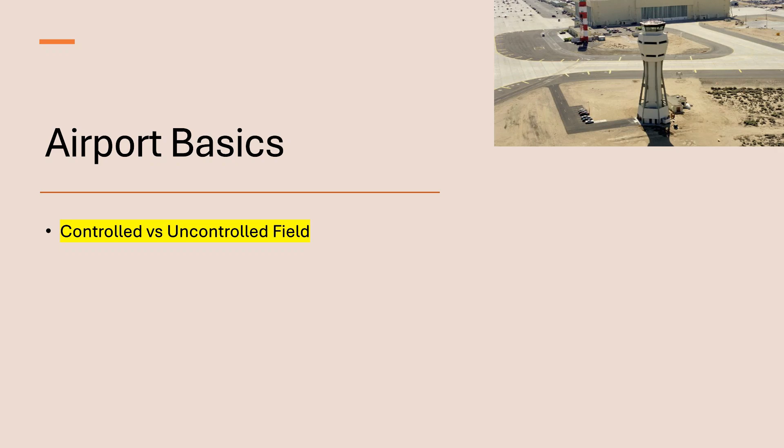Let's talk about taxiway signs. If it's got a black background, that means that's the taxiway you're at. So right there, it's showing us we're on taxiway Alpha. And if it has a yellow background, that means you're turning, for example in this picture, we're turning right onto Charlie. So black background means where you're at, yellow background means you're turning onto that taxiway.

Runway markings: if you're on the double solid line, so on the left side of this picture, that means you're about to enter an active runway. It's kind of like how highways work. If you're on the double solid entering the dash, that means you either need a clearance or you need to talk to someone and look both ways to make sure that runway is clear.

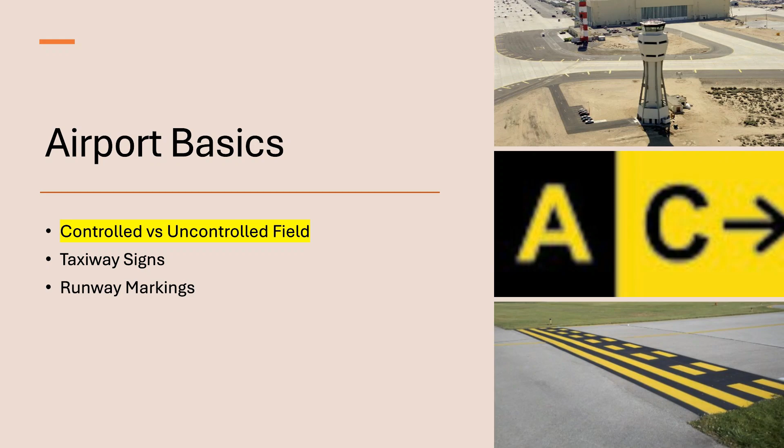And if you're on the dash side, going onto the double solid or the left side, that means you're exiting a runway and you don't really need a clearance for that. Just exit the runway, and if you want, you can make a radio call saying, 'Auburn traffic, emergency vehicle, clear of runway 36,' for example.

The ILS critical area, or instrument landing system critical area, is an area trucks have to hold short of in order to not block ground landing equipment. That way aircraft can use it to land, and it'll typically only be used in low visibility conditions. But personally, I'd always hold short of this at all times, just because some aircraft use this even in good weather to gauge where they should be when coming in to land, especially when using autopilot.

Let's say an aircraft has a stuck gear. They're coming in, and if we're there, there's going to be some sort of incident with that aircraft, whether it's a gear stuck, a failed engine, or something wrong with the aircraft. More often than not, that pilot may use an autopilot to help them down to the runway, and not all aircraft are equipped with GPS systems that'll use GPS approaches, so they'll use that ground equipment to help guide the aircraft down to the runway.

So I would always hold short of this critical area. It looks like that yellow ladder on the ground in the picture, and we'll show everyone what it looks like at the airport. Once the tower is in operation, they'll specifically tell you whether you're cleared to cross that critical area or not. But like I said, personally I'd just hold short of it at all times if the tower's not in operation. The tower will tell you when it's in operation during the day.

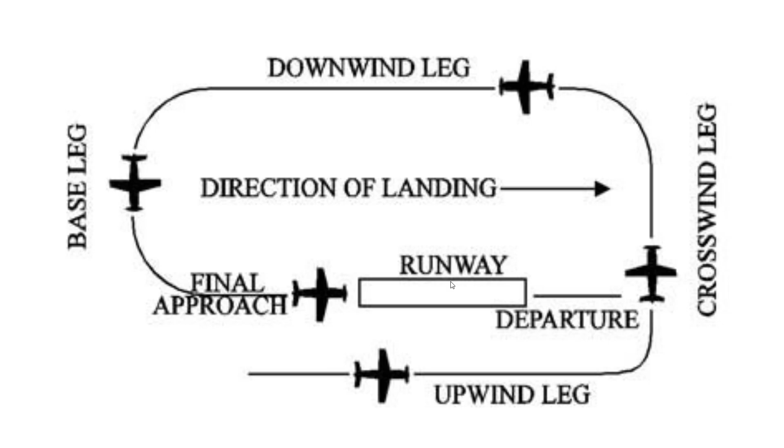Understanding radio usage is very important to build spatial awareness around the airport when listening to radio calls. Controlled airports require a clearance; uncontrolled airports do not, but you need to let others know what you're doing over the CTAF frequency. Auburn has a part-time tower, so around 7 to 8 p.m. it becomes an uncontrolled field until around 8 a.m., when the controlled tower opens back up and it becomes a controlled field again.

We talked about the general radio call layout: who you're talking to, Auburn Tower or Auburn Traffic depending on if the tower's in operation, who you are (emergency vehicle), where you are — if on the ramp, you'd say ramp — then your request. If the tower's in operation, it sounds like: 'Auburn Tower, emergency vehicle, FBO ramp, request taxi, runway 36.' Typically in an emergency, the tower will immediately clear you to taxi, and you just confirm 'clear to taxi' over the radio, as long as there's no miscommunication and you get your point across.

That's what we need to do. Just get her point across. The most important guideline in airport operations is just to listen.

If you have a ground radio, not everyone might have one, but make sure the incident commander is communicating what's going on to other emergency personnel across the airport. Use standard aviation terms over the radio, saying affirmative, negative, Roger, not 'clear.' If you say clear to a pilot over the radio, they won't understand. They're also painting a picture in their head of what you're doing on the ground as an emergency vehicle, so if they hear 'emergency vehicle is clear' or anything like that, they won't know what you're talking about.

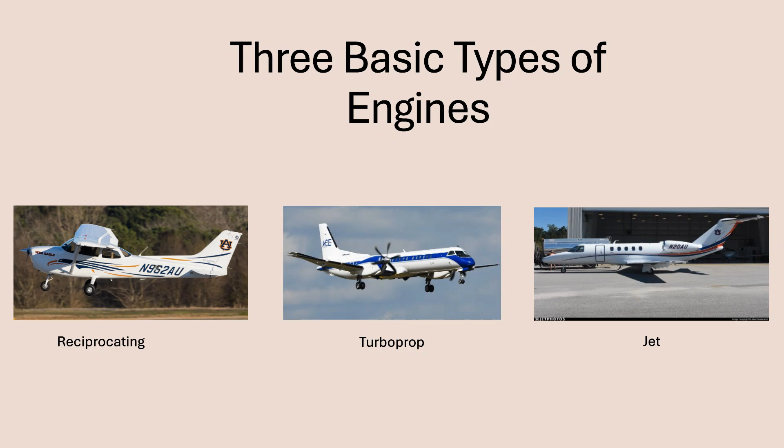Instead, you should use foam or a halon fire extinguisher to put out the Class B fire. ABC extinguishers are not recommended either, mainly because they can cause irreplaceable corrosion to the aluminum components and possible structural failure. As a last resort, if that's all you have, an ABC extinguisher is better than water. But just know that if you use these ABC extinguishers, that aircraft will have to have a major overhaul and possibly be scrapped.

General K-12 operations. Aluminum will not spark and can be cut with a rescue saw, such as a K-12. Many of you know this, but make sure you spray water on the rescue saw as you cut, so that the aluminum does not melt to the cutting device.

An auxiliary power unit, or APU, is a small jet engine. It sort of looks like this, and it's typically on the tail of most bigger airplanes, such as jets. The APU is used to generate electrical power on a larger aircraft. A lot of engine fires on startup typically apply to these APUs.

Moving on to outflow valves. An outflow valve is a little hole, typically in the tail of the plane. We'll talk more about outflow valves, but this is kind of what they look like. If an aircraft is having pressurization issues on the ground, such as it can't equalize the pressure, whether that's an electrical or mechanical issue, whatever's going on there—let's say you go up to a door and it will not open.

The first thing: do not force open a door that can't open on an aircraft. Typically what you'll do is equalize the pressure. You'll take a pick head axe or a pike hook and go to the outflow valve on the back, and there will typically be instructions on how to operate it. I've never opened or messed with an outflow valve myself, but there will typically be instructions. If you don't equalize the aircraft and you force open a door, that door can possibly shoot out and fatally hurt somebody.

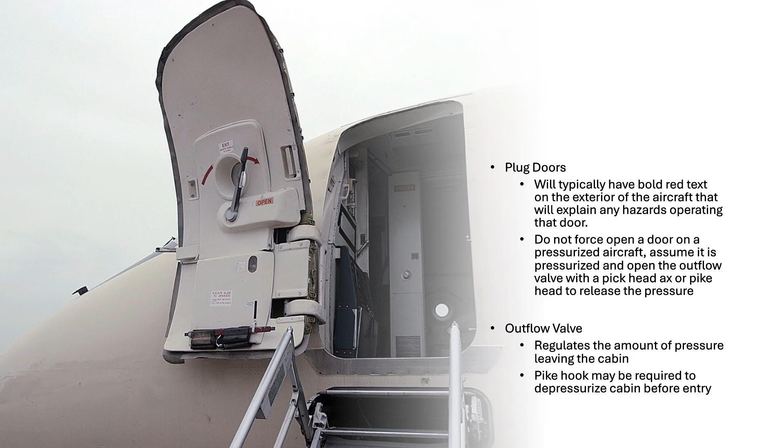This is something I found when I went to Montgomery, Maxwell Air Force Base. It's a very useful document called the Technical Order, TO 105E-9, issued by the United States Air Force, providing instructions for operating and repairing equipment in vehicles. This TO 105E-9 contains quick reference materials for military aircraft and many general aviation aircraft, such as the Cessna 172 which Auburn flies, plus military variants very similar to Auburn's aircraft, like the Piper Seminole which is closely related to the Cessna 310 also in this document. It does a really good job breaking down these airplanes.

I included it here because, as you can see, the Cessna 172 Skyhawk is known as a T-41 in the Air Force, but it's the same aircraft, just the military variant. This breaks down the general engine shutdown and the components that go into this Cessna 172, one of the main aircraft Auburn flies in their flight program.

When you're exposed to an aviation cockpit, whether a Cessna 172 or any of the other airplanes Auburn operates, you want to operate from right to left. The mixture control here controls the amount of fuel entering the engine cylinders. Pull this out to cut the fuel off. Then pull out the throttle control knob, which idles the engine. Then the ignition switch, the most important of all, will shut down the engine immediately.

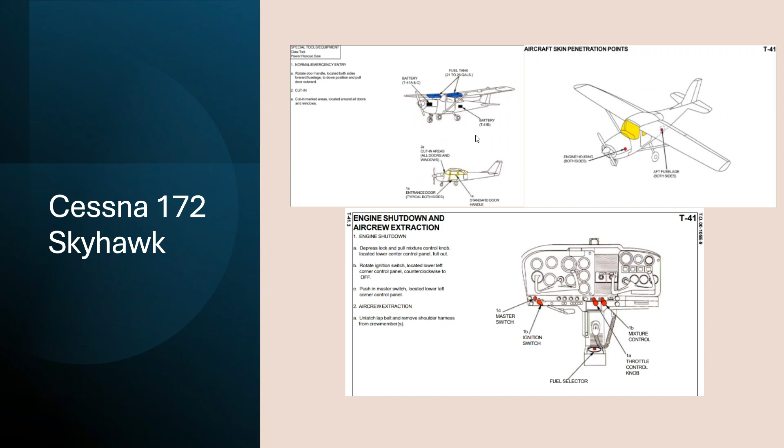As we said earlier, 100 low lead gas is very flammable, so be very, very careful with sparks because they do not mix well. Any type of aviation gas, whether 100 or 100 low lead, is a recipe for a not-so-good day. Here's a Cessna 310.

Auburn does not have a Cessna 310, but we have a Piper Seminole, which is very similar to this aircraft. It has wing tanks but does not have the fuel outlet that the Cessna has. It does have a very similar cockpit layout - again right to left, mixtures, props, throttles off, then the mags will be down here. I won't go over this one a lot since it's not the same aircraft Auburn operates - it's a completely different plane, just generally the same layout.

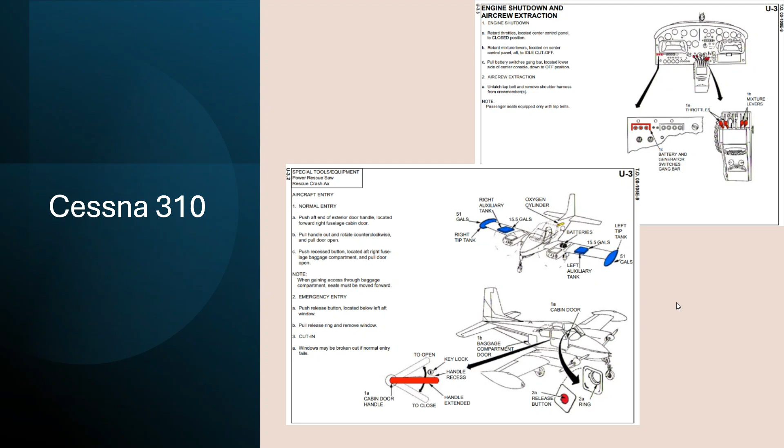But I'll get into the Seminole cockpit layout here in a second. Here is an aircraft overview of the two main aircraft Auburn flies - this is the Seminole I was talking about, here's the Skyhawk or Cessna 172, and the Piper Seminole. The Cessna 172 is a 53-gallon aircraft.

Fuel is mainly located in the wing tanks like we saw earlier. The door opens from a pull-out latch and it can only be opened if it's unlocked from the pilot side, on the left side looking forward. The doors do open on both sides, but it's only able to be unlocked from the pilot side. Really doesn't change anything if you have to extricate somebody, but just something to know.

Single engine, clearly. Both are reciprocating aircraft. This is a 110-gallon aircraft. Fuel is located in the rear of the engines, back here in these fuel nacelles.

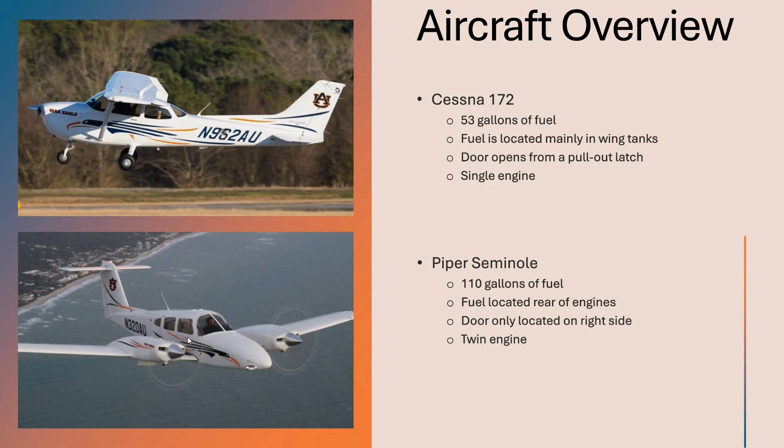There's one door here on the Piper Seminole. On the pilot side, there's only an emergency egress window. So that's the only way the pilot's going to be able to get out if he's entrapped in his seat. There's no door on the left side, only an emergency egress window, and then there's a single emergency egress window. Here's the Cessna Citation and the Saab 2000 we were talking about.

So Auburn flies two Cessna Citation jets with a team of 6 pilots, supported by a maintenance manager and a dispatcher. They fly faculty and administrators and support athletic recruiting for the school's football and basketball programs with that jet.

The Citation carries 870 gallons of fuel, but that is at full capacity. Pilots will normally land with around 300 to 400 gallons. This aircraft is pressurized. However, pressurized, like we said earlier, wouldn't normally be an issue as it would depressurize with weight on the wheels. But if the system does fail, you may need to use that outflow valve in the event of an emergency or electrical failure.

There is a main entry door forward of the left wing and an emergency exit behind the right wing.

The Saab 2000 also is operated by Auburn for sports teams to travel on. It's a twin turboprop transport category aircraft designed to carry 58 passengers. However, all Saabs operated into Auburn's airport are set up in a 30-seat passenger configuration. The Saab 2000 carries 1,370 gallons of Jet A fuel and will land with around 500 to 600 gallons.

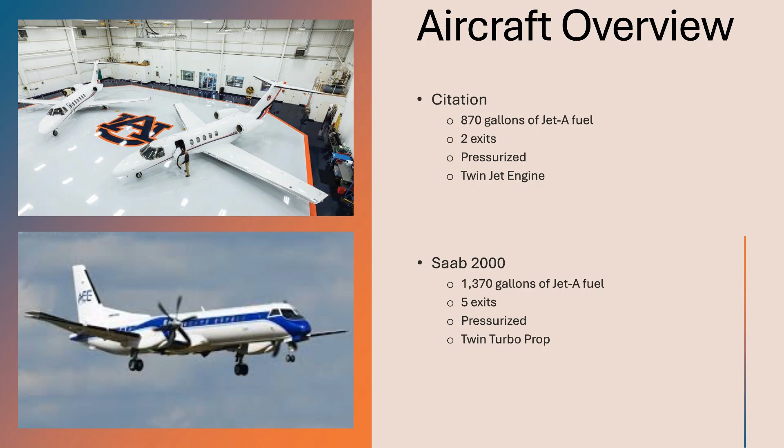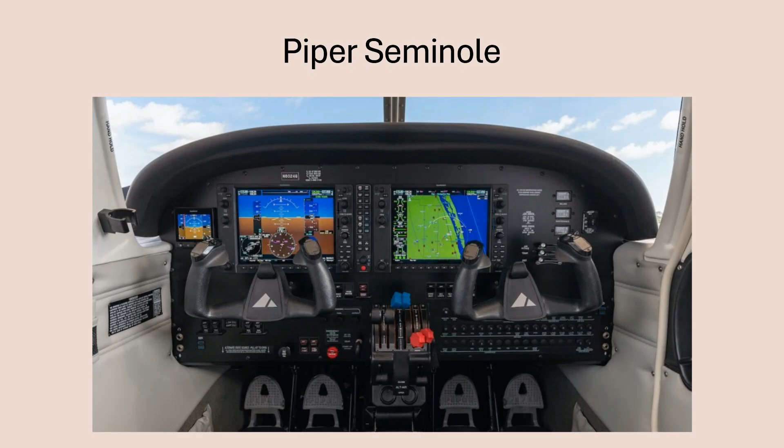So we talked about Cessna, we talked about Piper, we talked about some basic aircraft systems involving fuel, electrics, shutting down the engines. The last manufacturer I want to talk about is Cirrus. Cirrus has a few airplanes that operate in and out of the airport. Common models include the SR-20 and the SR-22.

These models made by Cirrus have some interesting systems that can potentially hurt first responders if they're not aware of how these systems work and how to deactivate them.

The Cirrus aircraft has what's called a CAPS system - a Cirrus aircraft parachute system. It's a rocket-propelled parachute that shoots out of the airplane and brings the aircraft down to the ground when the pilot deploys it.

Since it's rocket boosted, if it's not deployed by the pilot and is still armed on the ground - let's just say the pilot decided to land in a field or on a road and didn't need to use the parachute, which has happened in the past -

first responders need to be aware of how to either deactivate the CAPS system or how to avoid messing with the armed wire. There's an armed wire behind the pilot, where if that wire is moved even an inch, it could potentially deploy the parachute, shoot off a rocket, and possibly shoot shrapnel within a 1,000-yard radius and hurt somebody.

So this video is going to talk about the systems associated with the Cirrus, and then we'll go over the safety documentation briefly. We'll scroll through and see how to deactivate the system.

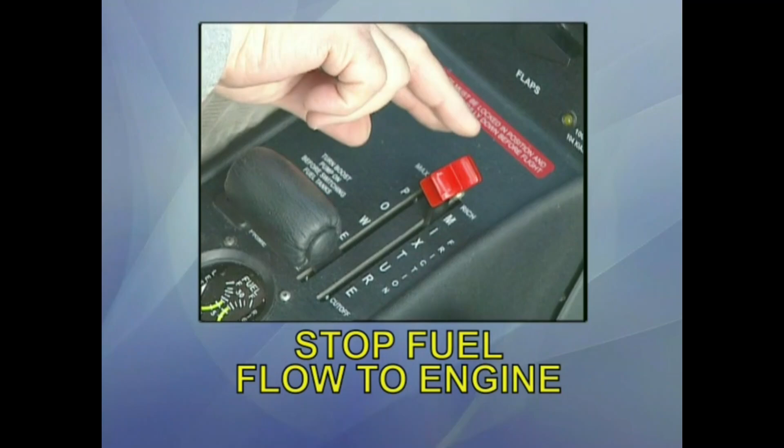Access the cockpit and locate the red fuel control. Pull the control aft to the idle cutoff position. Most fuel controls are red and have star-shaped handles. Others may resemble a large cabinet door pull.

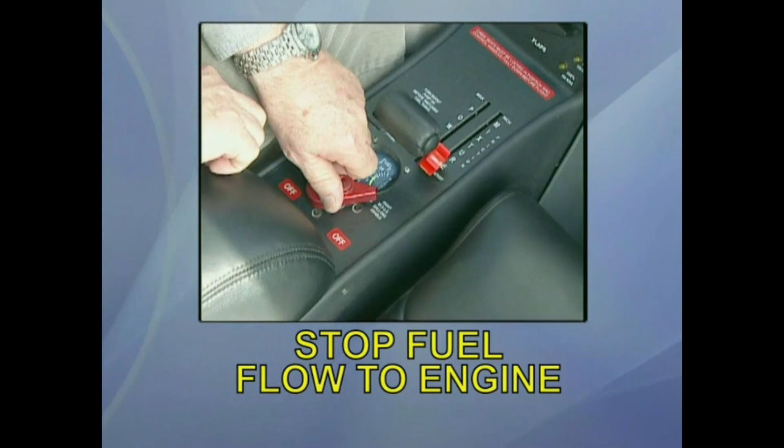You can also move the fuel selector valve handle to the off position. The fuel selector is usually located near the center of the instrument panel, in the center console, or on the left side of the aircraft's fuselage near the pilot's seat.

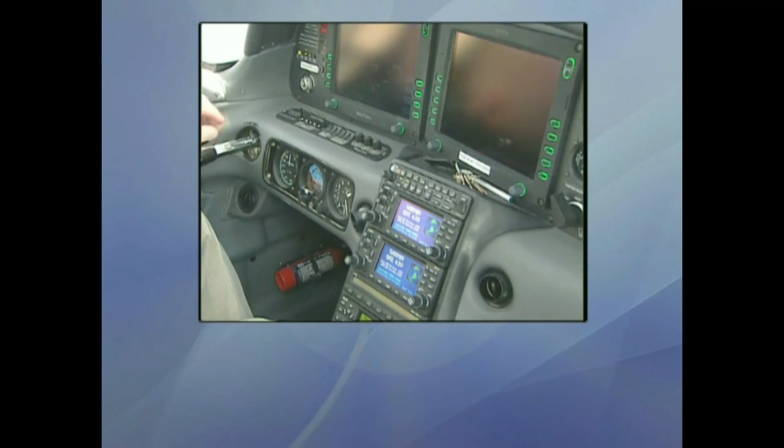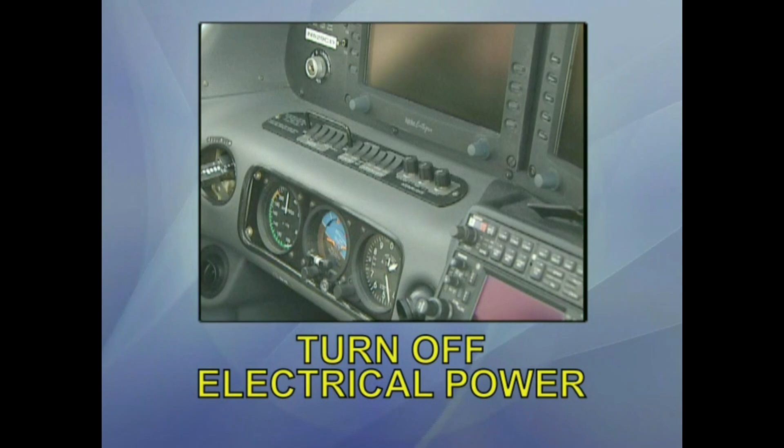Once the engine is shut down, turn off the aircraft's electrical power. Locate the master switches on or below the instrument panel, above the left cabin window, or below the pilot's left side window, and make sure the switches are in the off position.

If the aircraft has a key in the ignition switch, turn the key to the off position and remove the key. If the aircraft is intact and there is no fire, the cabin can be locked for security. Give the key to the accident investigators when they arrive.

Be aware of fuel, oxygen, and TKS tanks. Most aircraft carry fuel in their wings or in separate header tanks located above and aft of the aircraft's engine. Some have auxiliary tanks at the wingtips. Aircraft which are being flown long distances may have auxiliary fuel tanks installed in the cabin or baggage compartment.

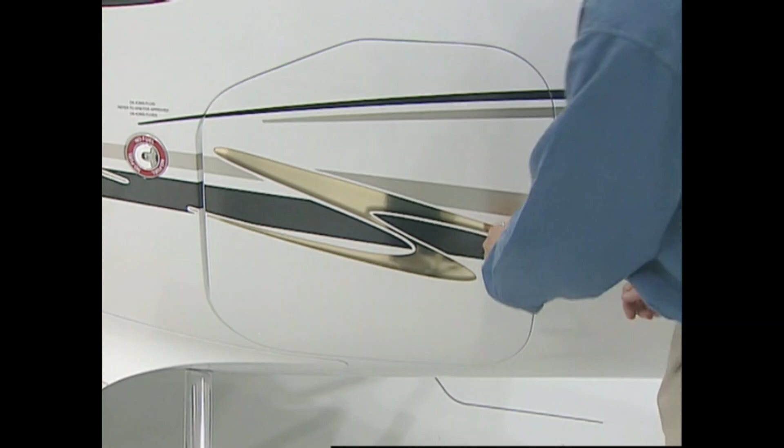Many of today's general aviation high-performance aircraft have TKS fluid on board to de-ice the aircraft's flying surfaces. TKS fluid is generally stored in a dedicated tank, but aircraft operators have been known to carry auxiliary containers of TKS in places like the baggage compartment or in the backseat of the aircraft. Similarly, GA aircraft that routinely fly at high altitudes may be carrying portable supplemental oxygen bottles on board. Oxygen, like TKS fluid, can present a hot spot in an aircraft fire.

Be on the lookout for composite hazards. Many of today's aircraft are made of composite materials and foams that can produce toxic or poisonous gases if they burn. The accident site should be approached from upwind while wearing an oxygen breathing apparatus or an organic vapor mask. Burned composite surfaces may disintegrate to the touch and may not support your weight. Extra care should be taken to protect yourself from composite dust, sharp needles, and shards of composite materials in the aircraft wreckage. Treat composite cuts or abrasions immediately.

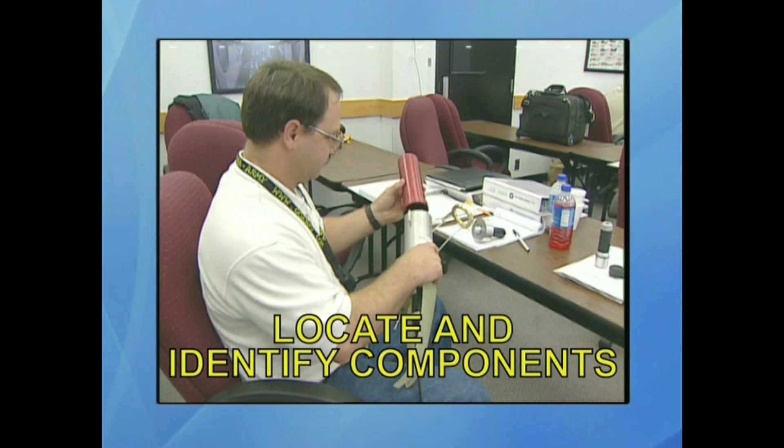Locate and identify all components of the CAPS or ballistic parachute system. Look for the rocket canister as well as the igniter assembly. The rocket canister is a red canister about the size of a 16-ounce beverage can. When you locate system components, always consider them as live ordnance. Don't handle them, and keep heat or flame away from them if possible. Mark the components to remind other first responders to stay away from them, and call the Cirrus hotline at

800-279-4322 immediately. Air safety personnel at Cirrus can help you determine what risks are present and will send trained accident personnel to assist you with disarming any and all safety systems in the aircraft or wreckage.

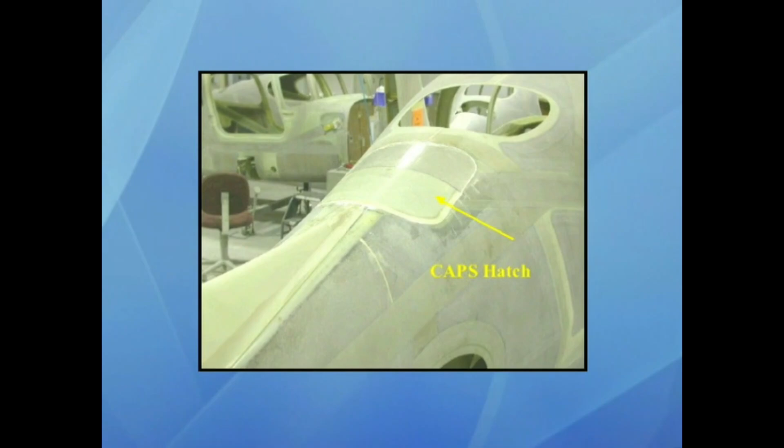An emergency locator transmitter, ELT, is required equipment for all certified general aviation aircraft. ELTs automatically transmit a locator signal to the U.S. Air Force search and rescue facilities if the aircraft experiences a sudden impact.

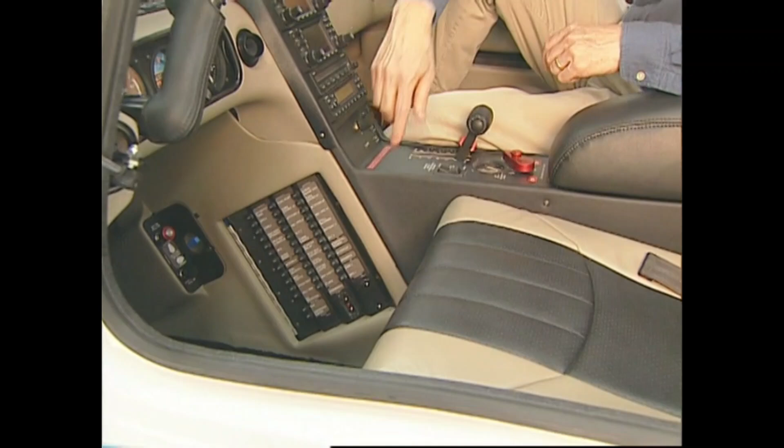You may be asked to locate and turn off an ELT at an aircraft accident site. On the Cirrus and most recent production aircraft, an ELT shutoff switch can be located on the instrument panel. If the ELT has been activated, a small red light next to the on-off switch may be flashing. Simply press the black button to switch the ELT off.

Never cut into the top of the aircraft or the area from the top of the doors to the baggage compartment, as this is where the CAPS activation cable is located. If this cable is pulled or dislodged more than a quarter of an inch by cutting or penetrating gear, the pull of the cable could set off the rocket igniter and deploy the rocket.

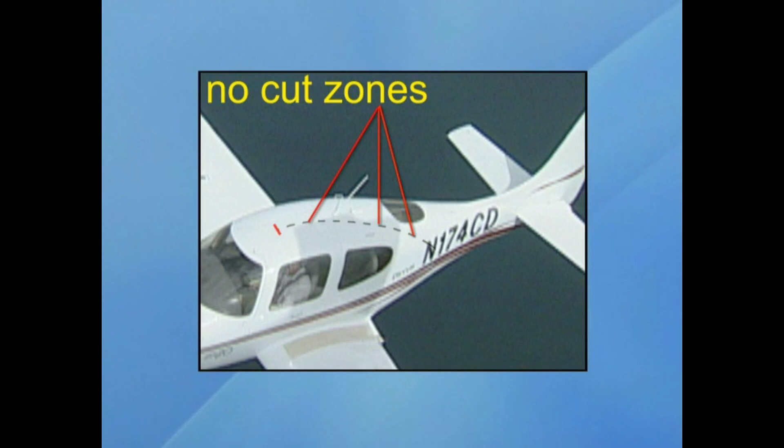If the CAPS system has been deployed during high wind conditions, the aircraft could be dragged downwind after it touches down, posing a hazard to personnel and objects on the ground. The best thing to do in this case is to collapse the large canopy by spraying it with water from a fire hose. Once it is collapsed, park a heavy vehicle on the canopy to stabilize the aircraft from further movement.

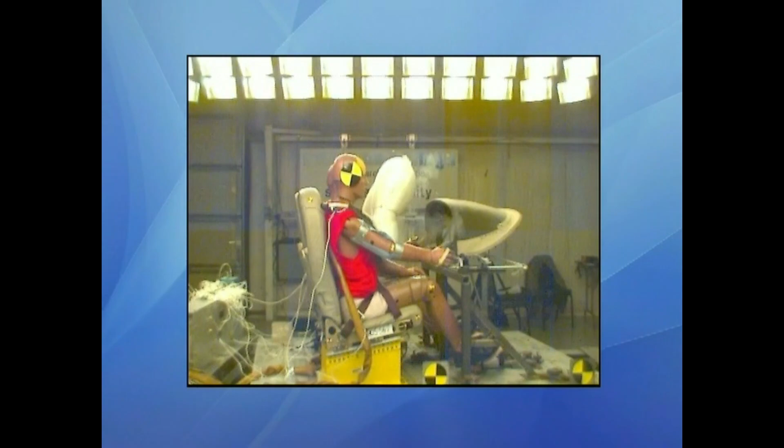The other potential hazard you may encounter involves the AAIR, or AmSafe Aircraft Inflatable Restraints. These restraints work like an airbag to protect aircraft occupants from injury to the head and body. On a 3-point system, the airbag itself is attached to the lap belt, while on the 4-point harnesses, the airbag is located inside the outboard shoulder harness. Both systems use a heavy leather shroud to protect the airbag itself.

The danger in this system comes from the fact that it uses compressed helium to inflate the airbag. Like the CAPS system, you must always assume that the system is live unless you see that the airbags have been deployed. Cirrus works closely with the National Transportation Safety Board to maintain an accident investigation team that's ready to respond to any Cirrus aircraft accident 24 hours a day.

Although each system's installation will differ slightly, all ballistic parachutes and AmSafe AAIR airbag systems will operate by the same principles and will use the same basic components. That's why it's important to know what to look for. Think about these things.

We have to assume that it's got a system on board when we go out to an accident, rather than be surprised by when we find one. I think that's the key. And then what do you do? How do you deal with it? Who do you call? Of course, you have to identify and notify. That's the policy: identify that you have a rocket, and then call somebody that can help you. Cirrus will be glad to help you.

The next time you respond to an aircraft accident or fire, consider that the aircraft might be equipped with a ballistic parachute and AAIR restraints. Proceed accordingly by approaching from the upwind side. Identify and locate all components. Assume the systems are live unless visibly deployed. Keep heat and flame away from the site. Remember the no-cut zone on Cirrus aircraft, and most importantly, contact the Cirrus Air Safety Department immediately. Finally, qualified personnel should remove all hazardous components from the aircraft wreckage before it's transported from the accident site to the salvage yard. We're committed to your safety, and we're here to help.

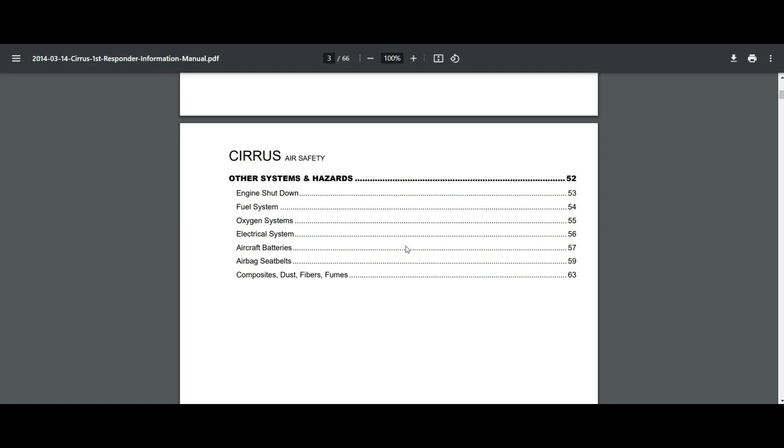There's a first responder info manual right here, and it kind of just goes over all of the air safety summarizations. It goes over the CAPS system, how to disable, securing, disabling CAPS. This would be the more important section to go over, so I'm not going to go over this in this presentation - if you want to, I'll share these documents. But it just goes over basics on how to disable the CAPS system, and has oxygen systems in here. Everything you need to know, just in one document, pretty well laid out - what pliers and cutters to use, so you're not pulling this Cirrus activation device for the CAPS system, because if you pull this, it could potentially deploy that. So, just important notes there.

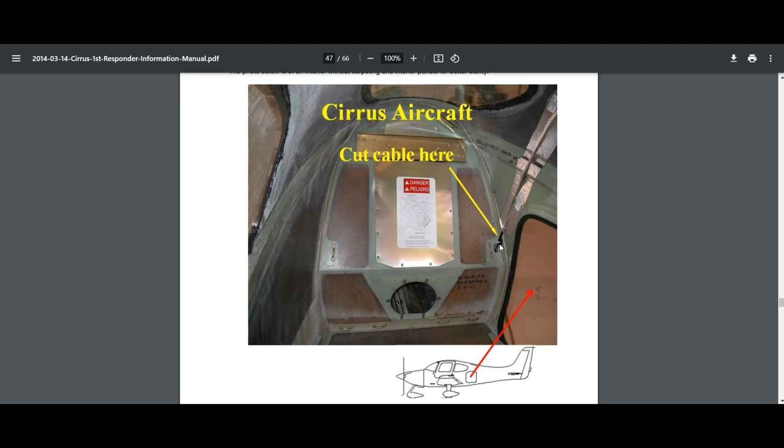Now we're going to get into some of the alerts. So we have alert level 1, which will be a low probability of an aircraft crash. So let's just say a multi-engine aircraft has one engine out, overheated engine, oil leak, etc. If there's a low probability of a crash, we'll do an alert 1, and that will stage an Auburn fire engine with foam capabilities and an Opelika fire engine with foam capabilities to the incident command, which will be on the Bent Creek side on the FBO ramp.

Then we have alert 2. Alert 2, we have a high probability of an aircraft crash - aircraft is approaching the airport with an engine on fire, loss of hydraulic pressure, faulty landing gear, etc. This one's a little difficult to go over and execute, because there's a lot of different areas these trucks have to be, and they have to be in certain spots. With alert 1, there's a low probability of a crash, and we're just going to have 2 trucks that stage on the incident command over on the east side of the airport at the incident command.

With alert 3, which we're about to go over here in a second, that'll be an aircraft has actually gone down and crashed, and all we have to do in that scenario is just go to the crash site. With alert 2, which is this one right here, this is the one where we'll have to stage trucks at certain spots around the airport, depending on which runway.

That may be radio information that the supervisors tell us. Maybe we know they're coming in on runway 1836, which I'll tell you right now, 1836 is by far the most popular runway at Auburn. There's 2 different runways, 1836 and 1129, and we'll go over these in a second. But 1836 is a lot bigger, it's just everyone uses it.

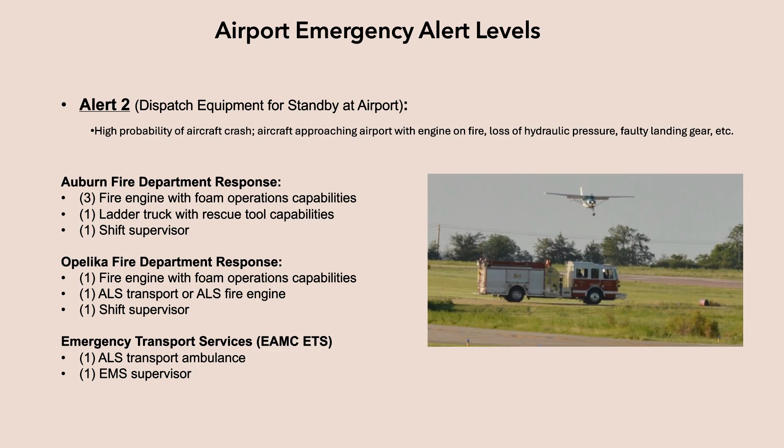I'll go over how to stage here in a second because we have an SOG that goes over this, but I've taken it and made it visual so people can kind of see where they need to go. And the goal is to print these off in the trucks so that people can have them at their disposal.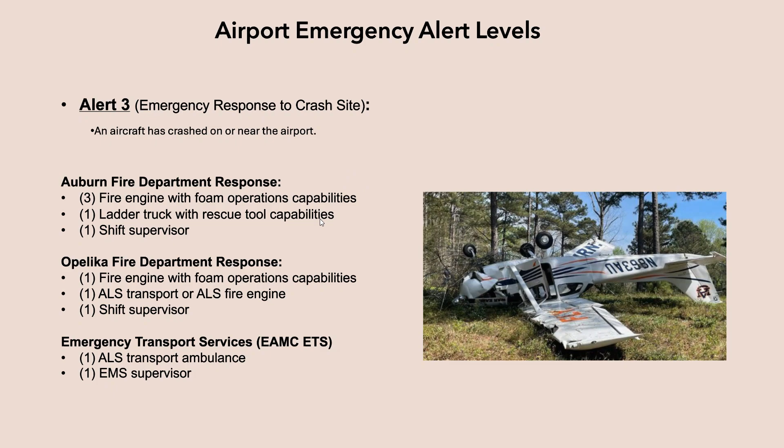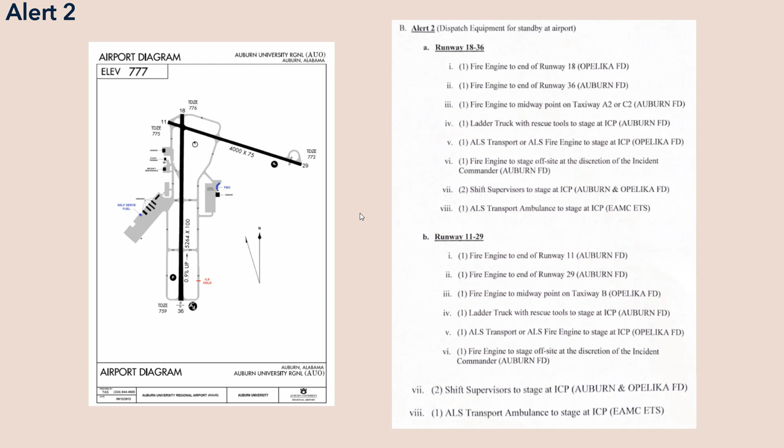All right, moving on to Alert 2. So Alert 2, this is what the SOG looks like from our SOGs between Auburn and Opelika. Here's what our airport diagram looks like. I've taken that and drawn it out so it makes it a lot more clear, and hopefully we get these printed out in the trucks. Auburn is going to stage at the beginning of runway 11.

Opelika is going to stage at Bravo, right at the midway point at runway 11. And Auburn is going to stage on the Tango over here, at the beginning of runway 29er. So all of this is runway 1129er, but Auburn is going to go there on Alpha. Bravo is going to have Opelika there, and then Auburn will also stage on the holding short area of runway 1129. And right here, we see the ILS critical area.

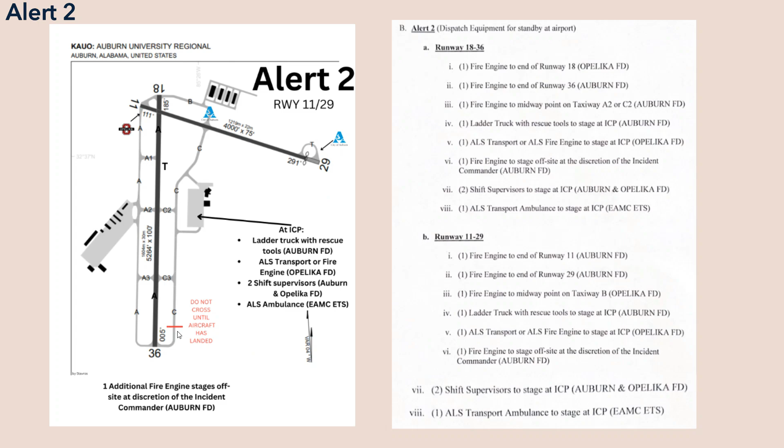So if we go back, the critical area is sitting right here. This is the critical area here. I'll tell you right here not to cross that unless you have clearance. As you can see, this little dot right here, that's ground landing equipment. What it does is it sends glide slope information to the final of runway 36.

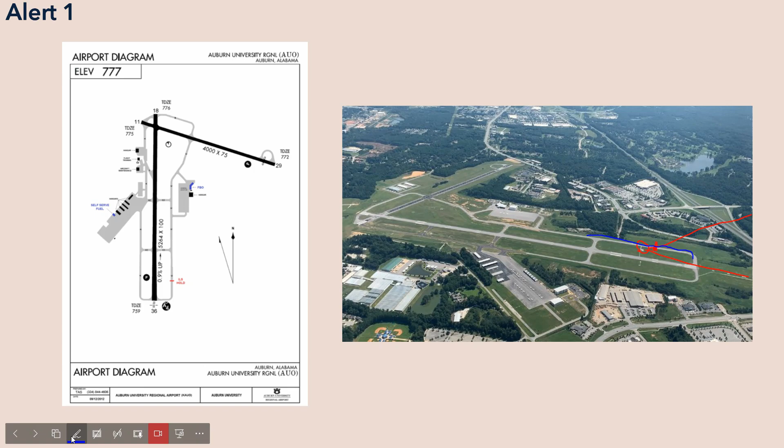Which means if you are bringing your truck over here, I'll draw this in blue. If you're right here and you cross this ILS critical area, you're blocking that glide slope information. That's why we have the critical area, for no one to cross unless they need to. Just some information there about the instrument landing system critical area.

It's a lot busier, everyone uses it. No one really uses this runway right here. It's used sometimes depending on the winds, but typically runway 1836 will be used. And then we're working on getting these maps in the trucks. Once the control tower is built, we'll need to communicate that to the tower to make sure they're also on the same page using those.